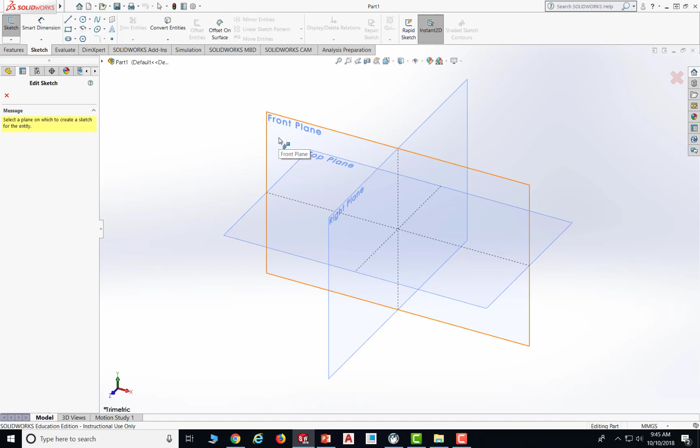And I go to Sketch. They actually already have one, so I go to Sketch. It will ask me for a plane, so I would create this part on the front plane, but it's up to you. I am putting it on the front plane.

Since I need to mirror and revolve in the future, I probably want to put the center lines first. So I'm going to go ahead and create the center lines. One center line is from here to the right, making sure it recognizes the origin, and the other one is vertical, a center line from top to bottom.

Then I am going to make the left part here. Once again, I just draw the approximate contour, then dimension that shortly. So I am going to make this part.

Go to a line here, I draw it straight down, and going up it has a little angle, as you can see. So I made it on the center line. Then I go up a little bit and make those two lines parallel, so I don't need to dimension later. And going up, I close the shape.

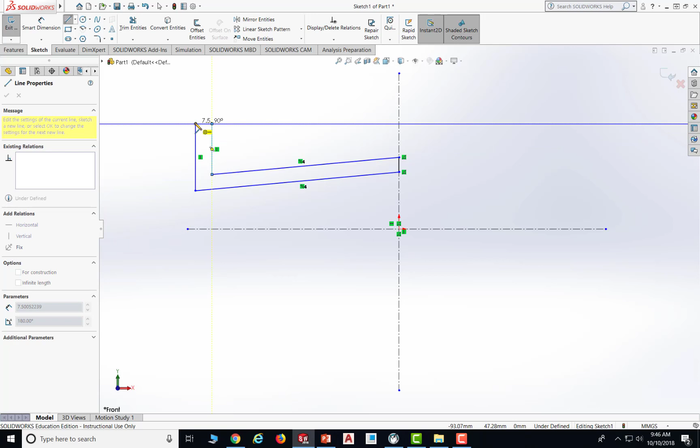From the drawing, as you can see, here are some fillets, and it says the fillet radius is all 5 millimeters unless specified. So we would recommend if you could put it on the sketch, make the fillets on the sketch, because when you get to the model, sometimes it's hard to create fillets. So put all the possible fillets on the sketch. I'm going to make the fillets with radius 5 millimeters.

So I see fillets there, and I say OK first. Then I am going to do fillets and select. So the radius is 5, and select those two lines. It's recognized there, but that's not right. So I'm going to delete that and select here, and this is the fillet I'm looking for, which is great.

So I say OK, then I do another one. I go to fillets again and select this tool, and the radius is 5. That's right, so I say OK.

Now I am going to give a dimension to those parts. So this is 22, this is 15, and the angle is 5, so I'm going to put them there. Actually, I should have put them first before making fillets, in case the fillets doesn't work, but in this case that's okay.

So I put the distance from here to there as 22, and the bottom one is 15, so from here to here it's 15, and also the length of that part. If we go back here, the length is 284, so I need half of that, so 284 divided by 2.

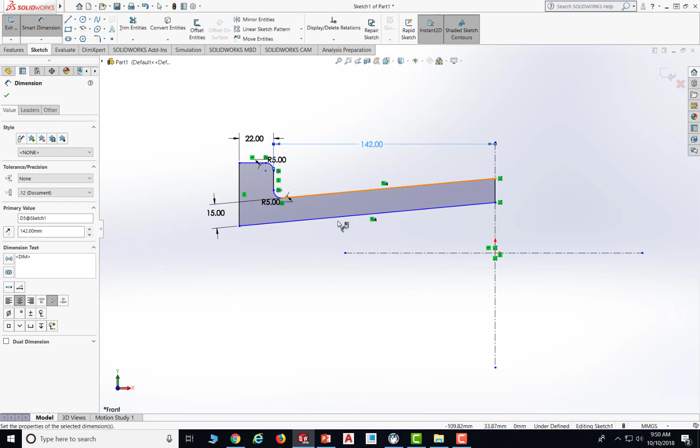So from here to the center is 284 divided by 2, all the way down there. Then I also need an angle one, so it says 5. So I put from here to the center line, the degree is 5, so I'm kind of close. And now I am going to extend the center lines a little bit.

And now you can see we have still some blues, so we need to figure out the height from here to the center line, and the height to the center line here as well. So we can go back to the sketch and look at the side view, the right side view. From here to the center is going to be the radius of this part, which is 100.

Also from here to the center it's going to be 75 divided by 2. So I'm going to go ahead and put those dimensions there. From the top, the smart dimension from top to the bottom is 100, and from there, this point, you probably select the point instead of the line because this is not a straight line.

So from the point to the bottom, the distance there is 75 divided by 2. With all these dimensions, the part is fully defined, and they're all black. So I'm in a good shape.

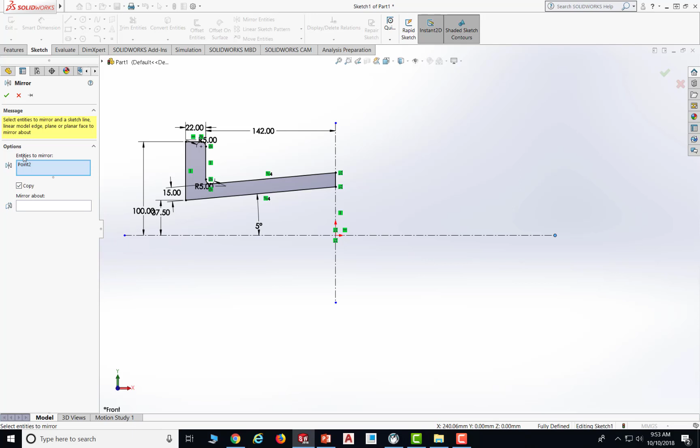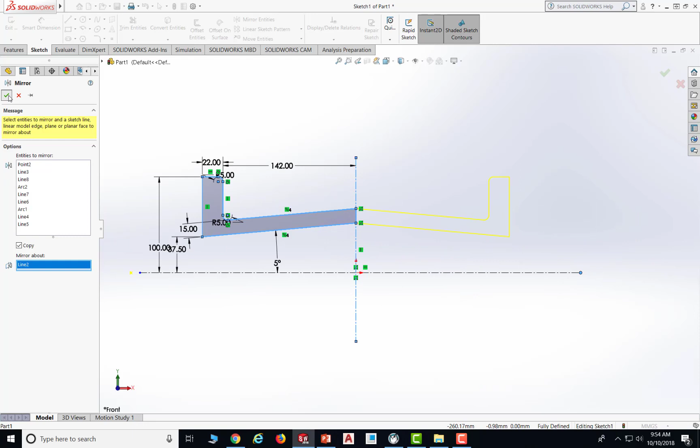So once again, make sure everything is fully defined until they're all black, then mirror, so you don't have to dimension them twice. So I mirror entity, and entities to mirror, I want to mirror all of them with the fillets. So I select all of them, and mirror about. This is going to be my symmetric line, and it looks right to me. Then I say OK, and then I save the work.

So save the work periodically in case you lose it. I will go to document... 128 and call it, okay, I'll just leave it as a part 1. Then I say OK.

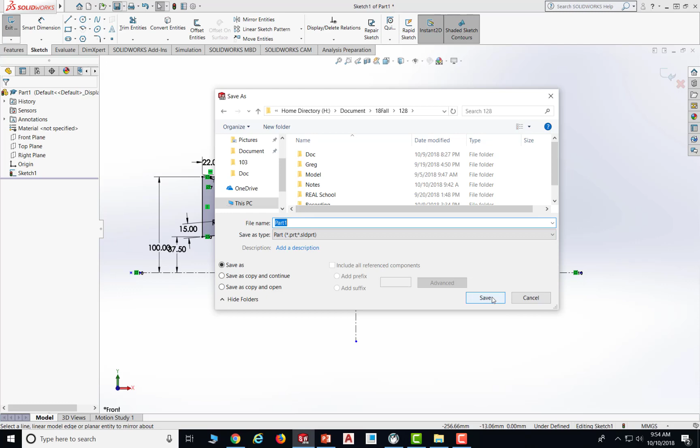Then after that, as you can see, this is dark, this is not dark. The reason of that is we have a center line there, so we could try to delete that. So when we revolve, we can revolve it at once. So let's go ahead and delete the line here. So delete that, so everything is dark, as you can see.

Now I am good. I am going to save the work again. Then I'm going to revolve it first.

Oh, it turns out to be underdefined. So let's take a look at that. Oh, actually I have an extra point here for some reason. See it? So I'm going to go ahead and delete that. It's fully defined again. So I am going to revolve this part.

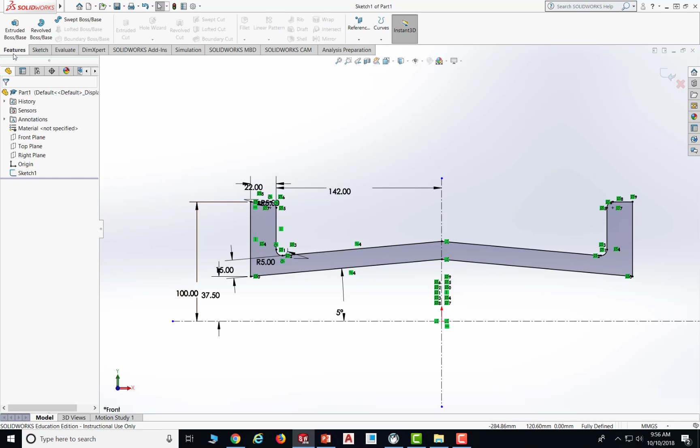So go here, revolve, and everything is selected. So it asks for the axis, so I selected this one, and it got revolved. Let's say OK. By doing that, I completed the main body part.

After that, I am going to create the top part. Now I am going to create a new surface, which is here. So if I look at the distance, it's going to be 110 on top of the top plane. So I'll double check. I think it's the top plane, and it's 110.

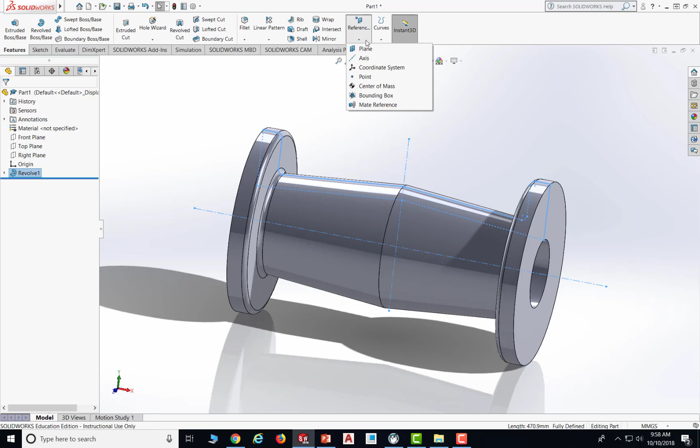So let's go back here. If I put my top plane here, yeah, it's exactly the top plane. So I am going to create a reference geometry, in particular a plane here, and it will ask me for the reference. So I want to select the top plane. I select the top plane and give a distance, says 110, and put the height there and say OK. And I got a new plane there.

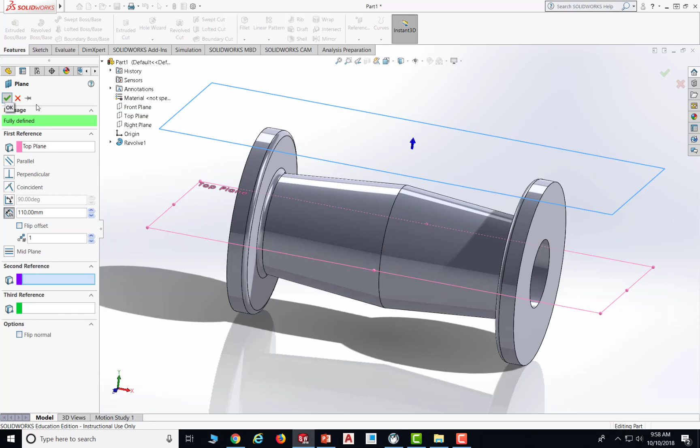And now I am going to draw the square piece there. So we can look at the dimension. The top part overall is 150 and has a hole there. It's 110. Right now we don't need to worry about the hole because we're going to use the hole wizard for that. So just put 150 there, and it's a square.

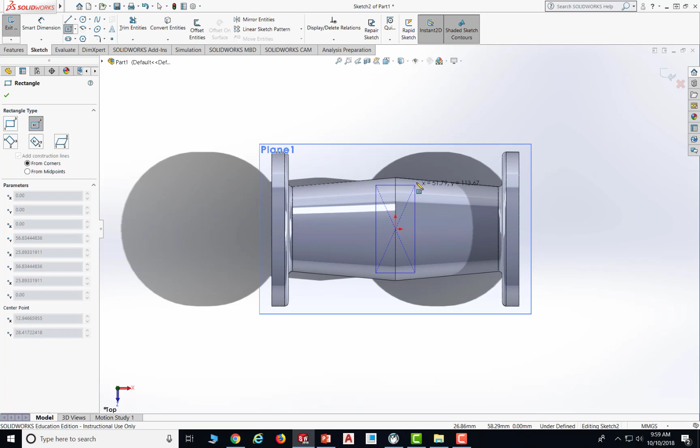So first of all, I want to change to a top view and put a square there. Go back to sketch and draw a rectangle, and I'll probably select this center rectangle, and this is the center. Do a rectangle here, and now I'm going to dimension that.

So it's 150 of each side. So 150 here, and also 150 here. And now they're all fully defined. They're all black. Now I am going to extrude this part.

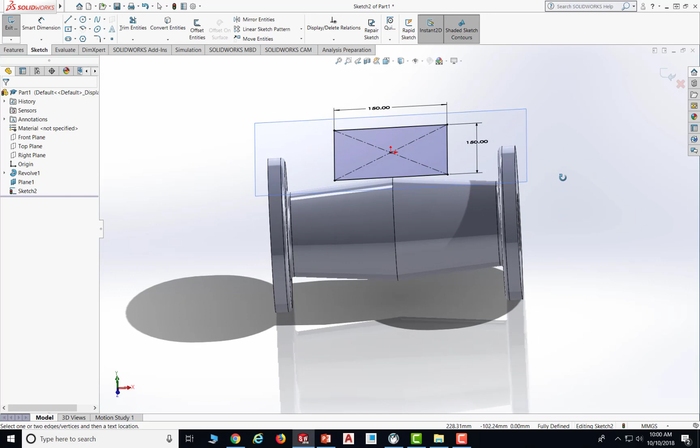Oh, before that, I have fillets. I have fillets there, and the dimension of the fillets is R20. Okay, R20. So I'm going to make the fillets. I go back to the top view and do a fillet. Select, so I put a 20 there.

Select the two edges, and also here, and also here and there. Select this and set it to 20, so they look good. I say OK, and it's still fully defined, and I save the work.

Then I am going to extrude. Right now it's 110, so I probably want to extrude up instead of down, because I made the reference surface here. So I'm going to extrude up at 22.

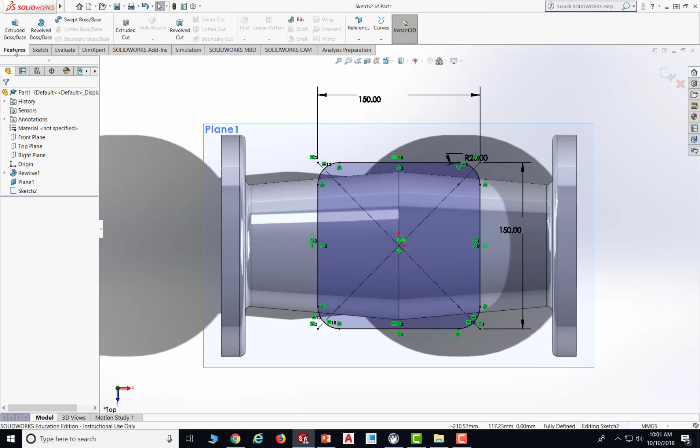I go back here, go to Features, Extrude, and recognize that. Right now the direction looks right to me, and the height is supposed to be 22. Change the height to 22, then overview looks right to me, and say OK.

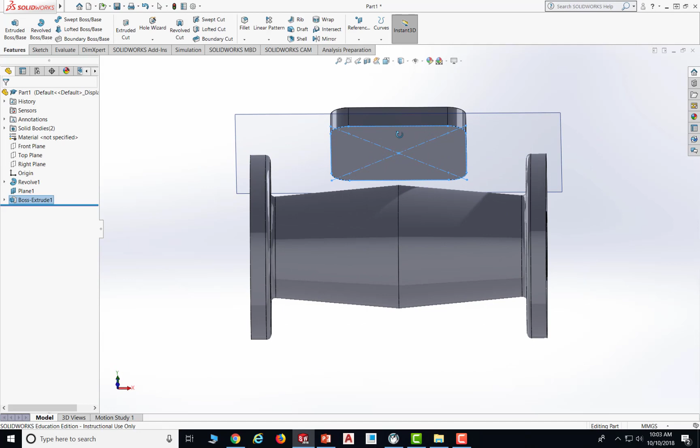Now I am going to make the circle here, which is this circle, from here to there, and extrude. The diameter is 80, so I'm going to make that circle. I flip it back here, and I still work on that sketch.

Go to sketch, and it will ask me a plane, so I say OK. Now I'm going to make this on the plane at the bottom instead of Plane 1. If you use Plane 1 it would probably work as well, but now I am going to select the bottom plane.

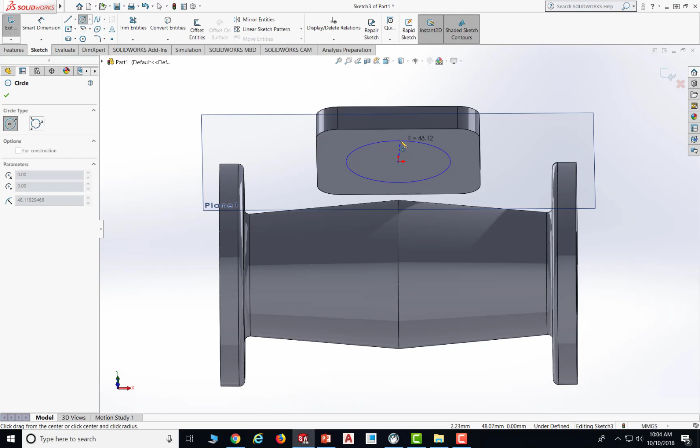And draw a circle there. From the center, draw a circle, and the diameter is supposed to be 80. So I dimension that with diameter 80, and say OK. Now it's all black, all fully defined, and I save the work often.

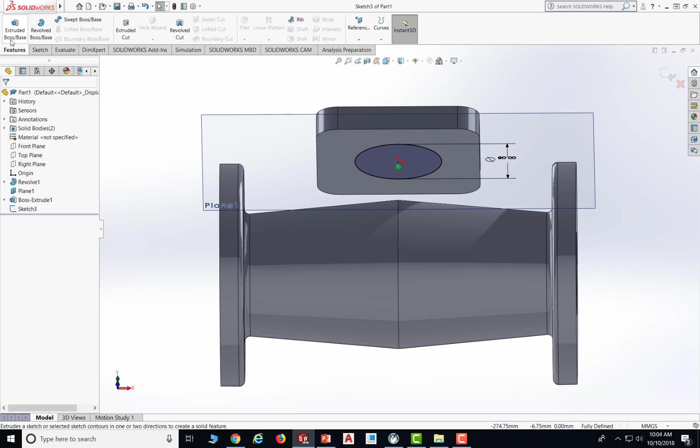Now I am going to extrude it down. I go to Features, Extruded Boss/Base, and go down. Right now I don't want it to be blind, but I want it to go until the surface. So, until the surface - I am going to select Up to Next. That looks right.

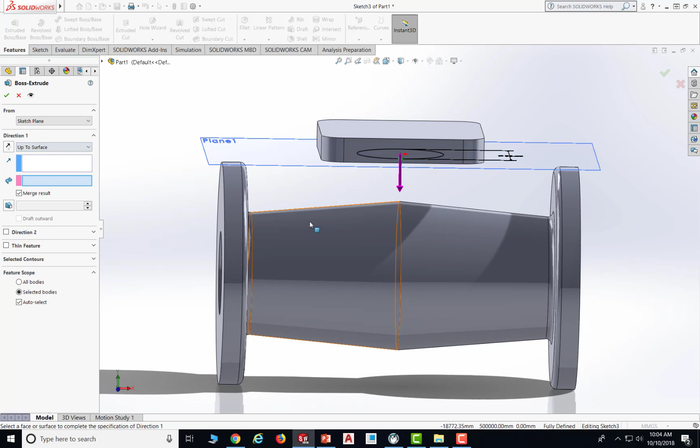Or you could select Up to Surface and select the surface. For this one you probably need to select both. So let's just do Up to Next - that's easier for us. Up to Next, and say OK.

And now I got this part. Now we are going to create this part, on the front plane.

So I'm going to draw the contour like this and do Revolve Cut. And when you do so, be cautious - there is a 1 degree taper. So when we draw this, we're going to include that.

We go back here. So the inner diameter is 48, and the radius is 3, so the outer diameter is 55. So we are going to make that part. First of all, we want to go to the front plane.

Go to front plane, then click Sketch and make a part on that. We probably want to go to a front view first and a front plane there. So if I don't want to see Plane 1 anymore - as you can see, there's a Plane 1.

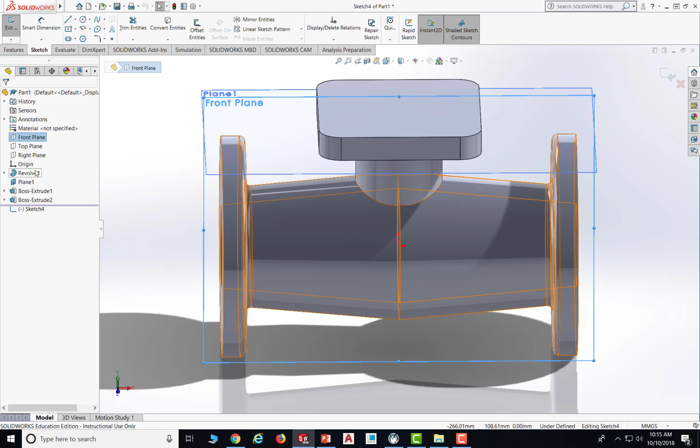So I left click that and hide it. I only want to see the front plane. I'll click the front plane, then go into the sketch here. So it's still on the front plane.

And I am going to draw that part. So it's from the top - draw the contour like that, and we're going to dimension that shortly. Seems like pretty little, so I draw it little as well. It's until there, so I just make it at the bottom, doesn't matter.

And I close the part. Now I'm going to give dimensions. So the top one, the dimension says it's 55 as the diameter. I go to Smart Dimension.

I do radius as 55 divided by 2, that's the diameter. And the inner one, the diameter should be 48 divided by 2. So I dimension that as 48 divided by 2. And the height there says 15, so I dimension the height here as 15.

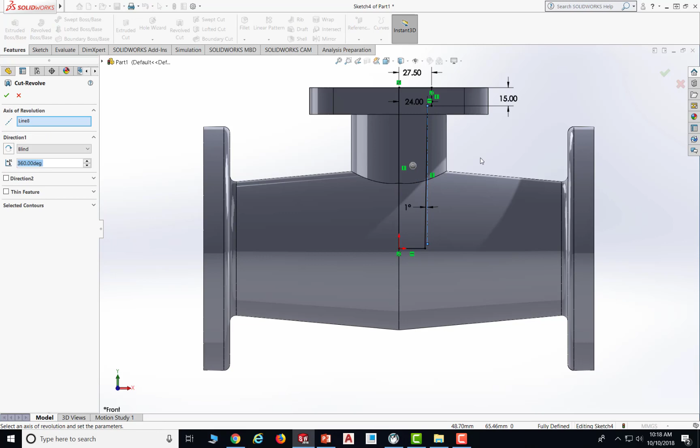Now I'm going to use the Revolve Cut. I go back to features and do Revolved Cut. This is a plane, that's right. I am going to select the axis here - this is apparently not the right axis, so I delete that, and I select the center line instead. And I say OK.

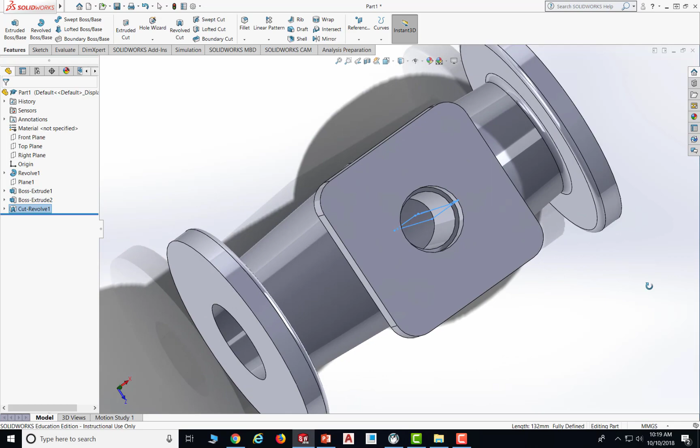So after that, I create a hole in the middle. I got a hole in the middle. And I save the work often.

Next, we're going to make all the holes. First, let's make the top hole. I switch to the top plane and make holes using the hole wizard. I select the third one, the simple hole, since we don't need the counterbore or countersink - just select the center, the simple hole.

For the diameter of the hole, let's take a look at the drawing - the diameter of the hole is 18. So I selected, we need not ANSI inch but metric, and the size is 18. We don't have 18 there unfortunately, so I go to show custom sizing, and I change the distance here to 18.

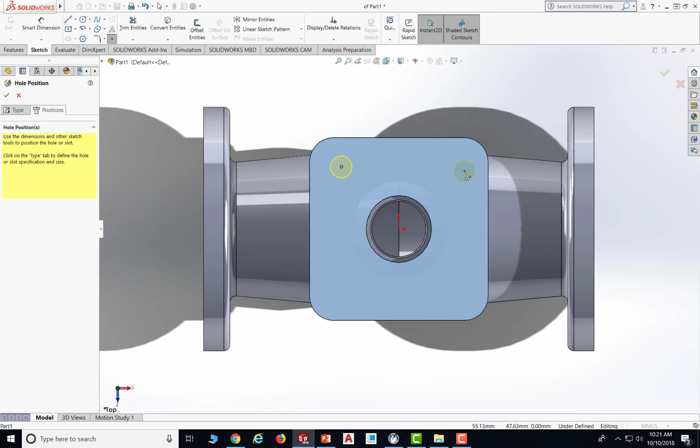Now for the position, I go to the positions tab. It asks me to select the surface where I want to place the hole. Let's put it here, here, here, and here. After that, they're all blue, so I need to dimension them. I go to smart dimensioning, and dimension here to here as 110, and same thing here, from here to here is 110 as well.

Now I need to give the side distance, so they're all 20s. If I go back, so they're all 20s - I'm going to give a 20 for them. From here to the edge it's 20, and from here to the edge it's 20 as well. You need to dimension all of them, so this is black, also from here.

Let's do it in another way instead of putting all the 20s. I'm going to make this vertical, or make this horizontal - instead of giving dimensions, I'll add relations. I select those two points and say they should be vertical, say OK, and that one is black. Now I'm going to make this two horizontal - add relation, those two are horizontal, and it's black. So I'm going to make this two a vertical relation as well, select this point and the other point, say they are vertical, and say OK.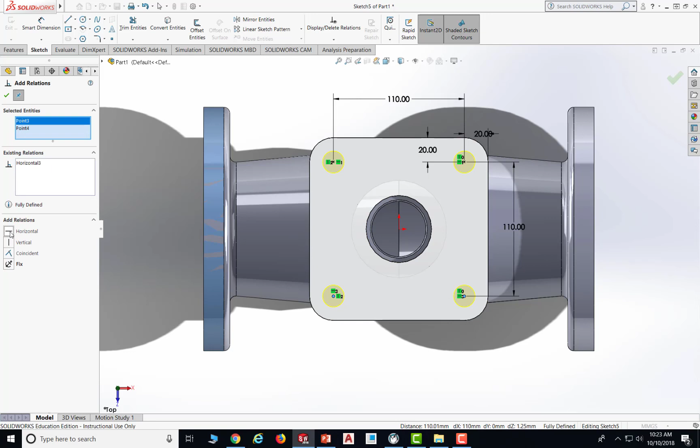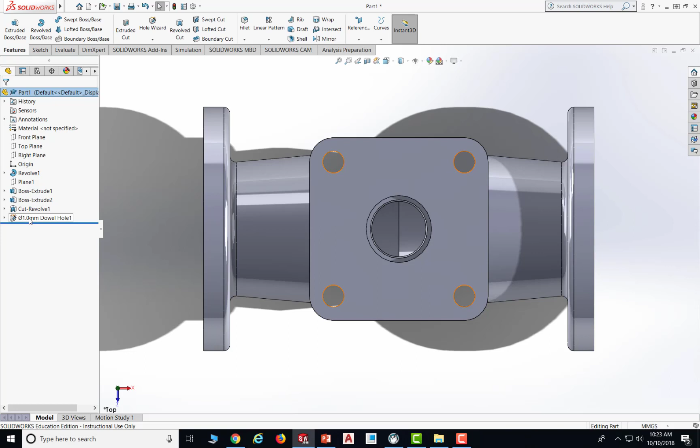I also needed to make this two horizontal, so I add the relation one more time, select here and there, and say they're horizontal, say OK. Now everything is black, so I say OK to the holes and double check, no minus sign there. I'm going to change the diameter from 1 to 16 to avoid confusion - I actually did change it to 16, but the name here says 1, so I'm going to go ahead and change it here.

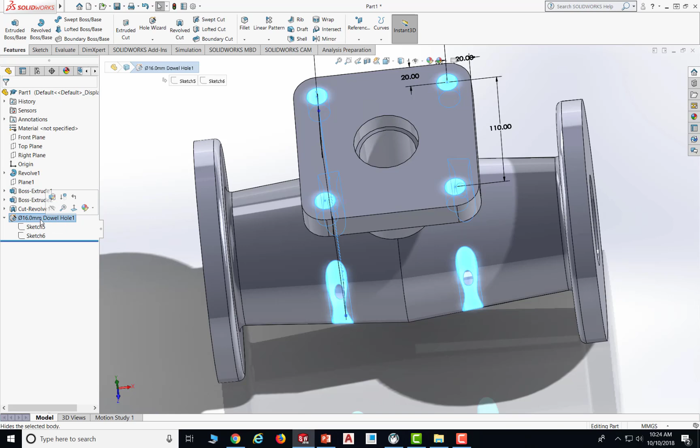Now all those holes, oh, it's actually got cut here, so we need to change it a little bit. Instead of through all, we need to go ahead and change here. So I left click or right click, doesn't matter, and go to edit features. In all holes, we don't want it through all, instead we want it up to the surface, or up to the next.

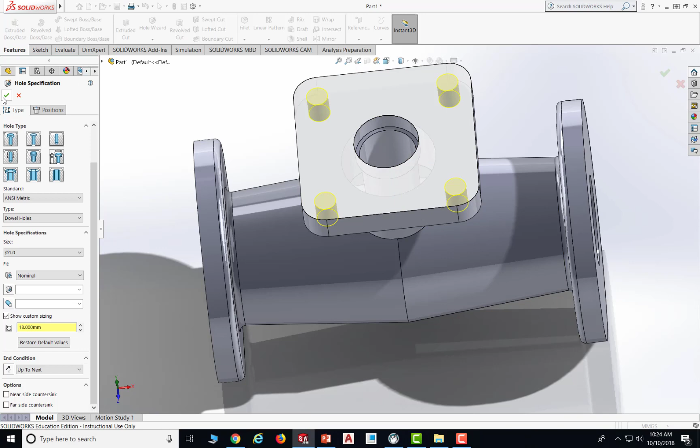Let's see what's going to happen if we do up to the next. Now it looks right to me, so just say OK. That's the hole we are looking for.

And now we are going to cut holes on this side. So I am going to switch it to the right plane. Go to the right plane here and make holes. So for the holes there, I have a 15 degree angle, the diameter is 18, and the centers are at 160. So I'm going to make those holes.

So I go back here, and first of all I need to create a center line. I go to sketch and click sketch, and it asks me for the surface. This is the surface I'm looking for, so I select the surface, and I am going to create a center line because I am going to dimension the 15 degree angle, if you remember that. So I put it here.

I am going to use hole wizard and go back to features. Okay, so it's not on because I need to go out of sketch first, and then go to features and go to hole wizard.

Go to hole wizard here and make a simple hole again, with diameter size 18. I take a look, it doesn't have 18 either, so I just change it to 18. So it's 18 here, and up to the next, looks right to me, and I go to position.

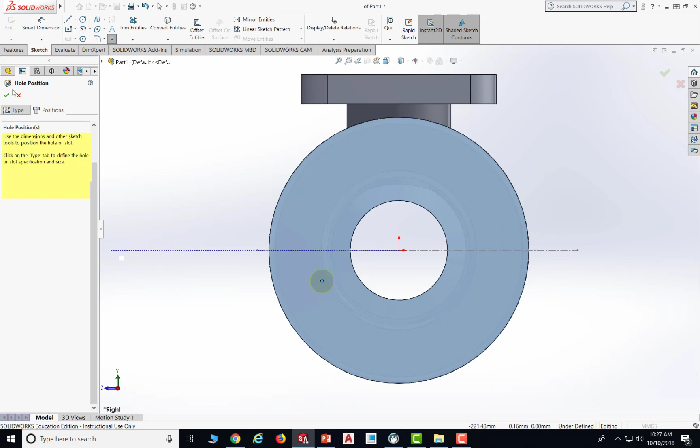Okay, we are going to dimension, so the dimension from here to the center, that is 160, and half of that is 80. So I put 80 here.

And also I need to give an angle, so I need to create a center line. Say OK, then give a center line there from here to there. Actually the center line there probably may not work because it's on the other sketch, so we do need to remake the center line there, and I'm going to go ahead and delete that center line because we don't need that. So from here to there, make a center line.

The center line has to be on the surface, otherwise when you dimension you may have trouble in the future. So select those two center lines and give an angle, say 15 degrees. Now as you can see, it's black, and now we are good for this hole.

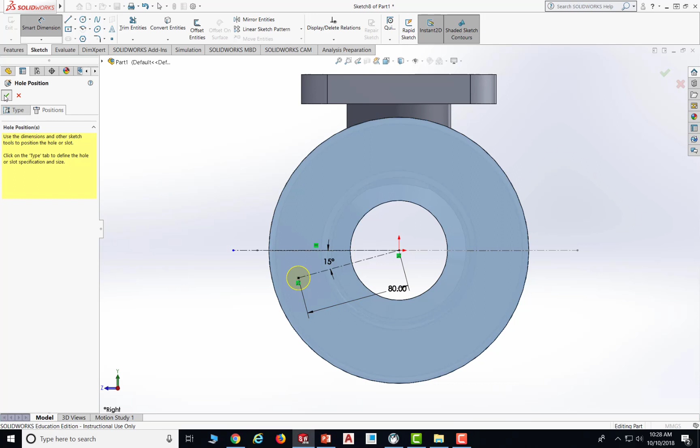First of all, I'm going to delete this sketch because we don't need that. So I right click and delete that and say yes. And I'm going to create a circular pattern to make more holes like that.

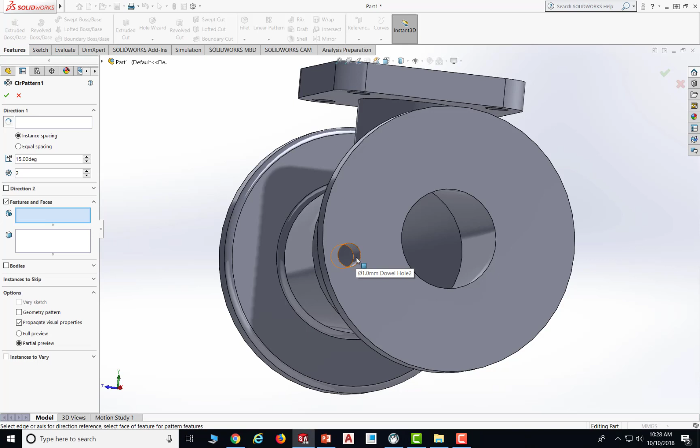So I go to linear pattern, circular pattern, and I want to make more of this hole, and I rotate. So for the direction, I select the entire part here, and it asks me how many do I want.

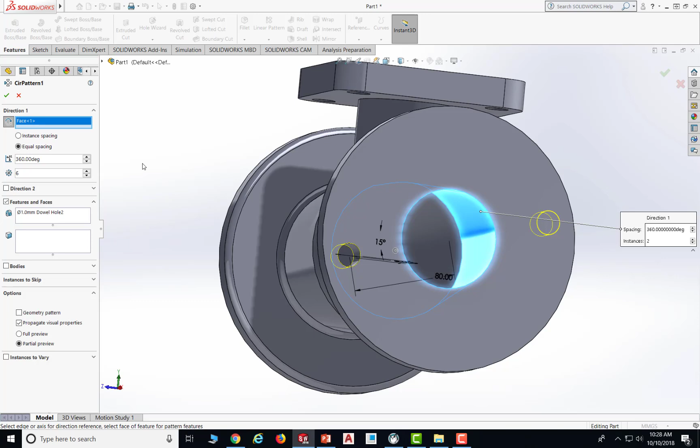First of all, I wanted to check the equal spacing option, and I need 6 of them. So I put 6 there, and the overview looks good. Let's say okay, and now that's the holes, and I do the same thing on the other side.

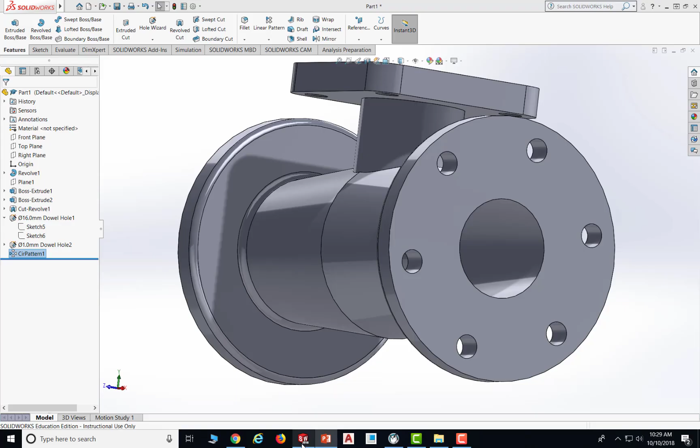So on the other side, I actually did a 15 degree angle on this side. If you look at the drawing, the side view, those 2 holes are in the same position. So 15 is there, so I go back to the part. I did 15 this way, so if I flipped it over, I would need to do 15 the other way instead. So I need to create the 15 degree in this direction.

So I am going to do hole wizard one more time and create holes. Before we do that, this is supposed to be 16, remember we changed that? So we changed it to 16. Now we go to hole wizard and get the hole here, it's the same size, looks right to me.

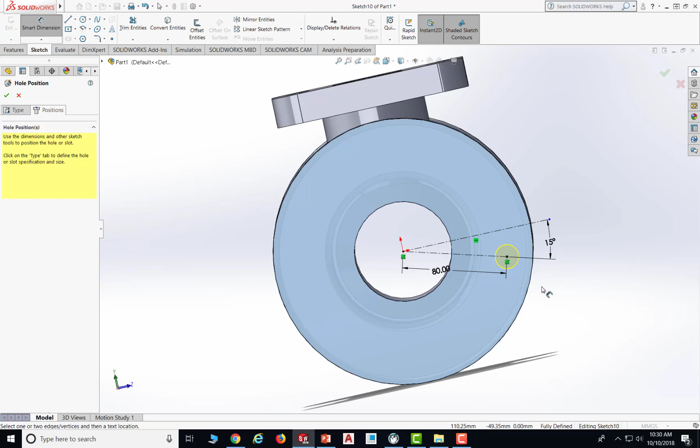I go to the positions tab, select the surface, and put the hole here, dimensioning it so they're the same dimension. It's 160 divided by 2, so 80 for the distance. I give it an angle, creating center lines from center to center and another from center to horizontal, making sure the horizontal relation shows up. I dimension the angle as 15 degrees, and change the diameter here to 16 instead of 1 to avoid confusion.

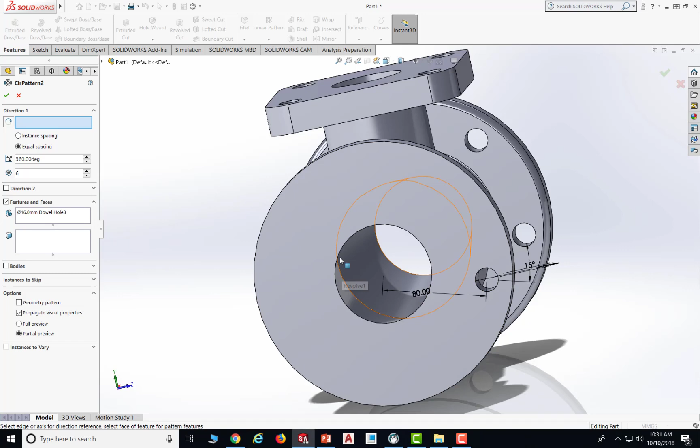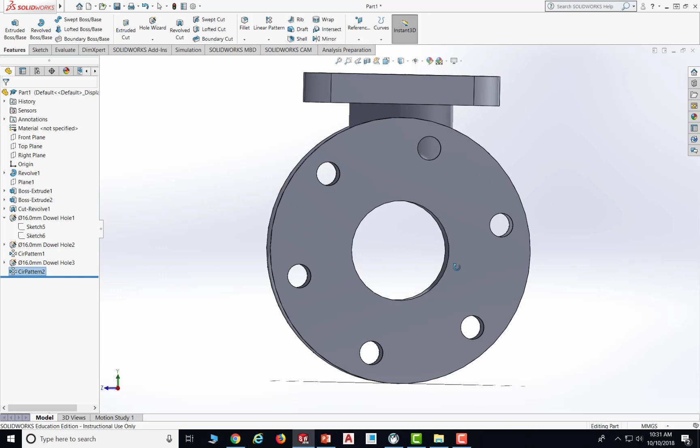Now I'm going to do the circular pattern one more time. I select the feature I want to create, which is the hole, but I select the entire body, not just the circular surface. For direction, I select the body instead of just the surface, because the surface or line sometimes doesn't work. I select all 6 and say OK. As you can see, all these holes line up in both directions, so I'm in good shape.

At the end, we need to add more fillets, here and here. This one we're supposed to add on the sketch, so I'll go ahead and fix this on the sketch. There are also fillets here, but those kinds of fillets we haven't learned so far — we'll worry about them in the future. So in this exercise, you don't need to worry about those fillets.

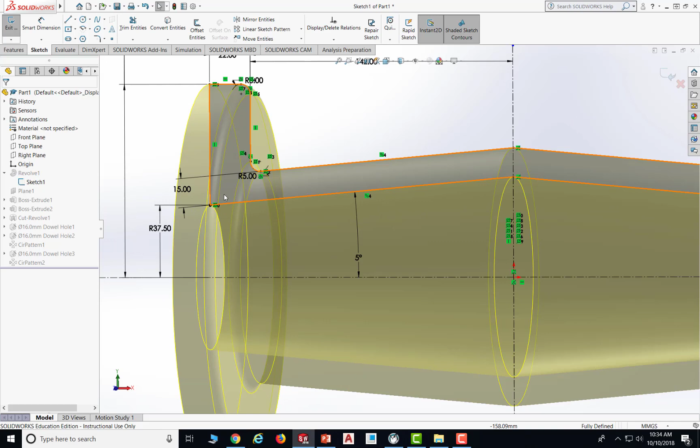Let's go ahead and change those two chamfers. This is 2 times 45, so for me that's a chamfer. I'll do that first. I go to the sketch, into this sketch, and I'm supposed to have a chamfer here. So I go ahead and do a chamfer.

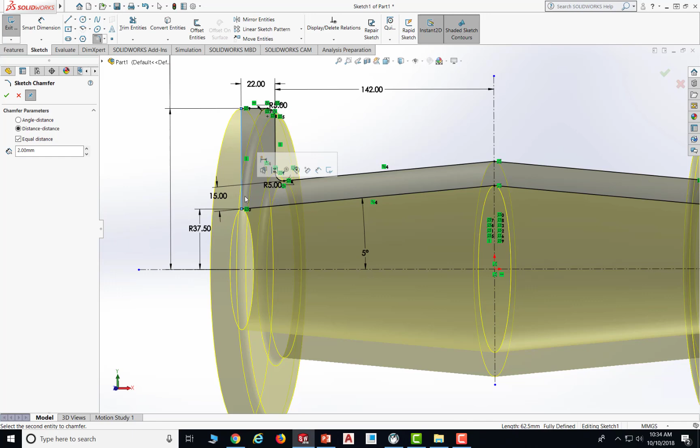I select this, and it says 2. I selected this, and the chamfer is here. That looks right to me, so I say OK. I also need the same thing on the other side, so I go to chamfer one more time, set it to 2, select this and that, and say OK. Now I'm going to save the work.

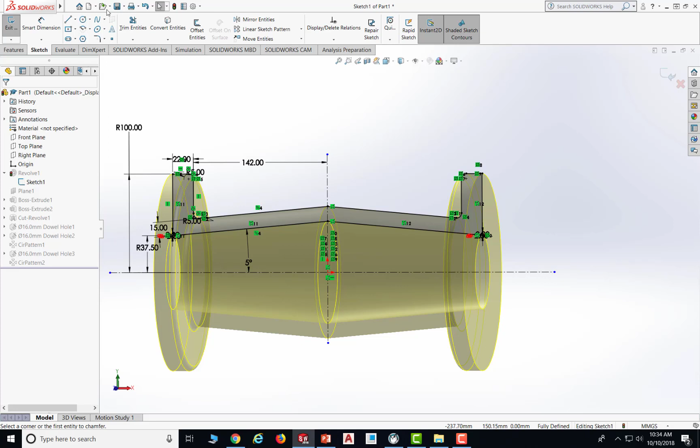When I save the work, it asks me to rebuild. I say yes, because I did a chamfer there, so the part needs to be rebuilt. That's why it's asking. So I just say rebuild and save the document. As you can see, I have a chamfer here.

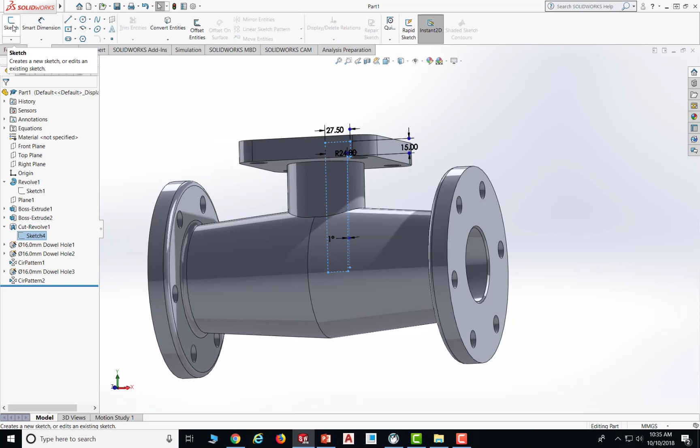The next thing I'm going to add is this fillet here — it's R3. Same thing, I need to go back to the sketch. This is the sketch, so I click that and click sketch, go into the sketch, and put a fillet from here to there.

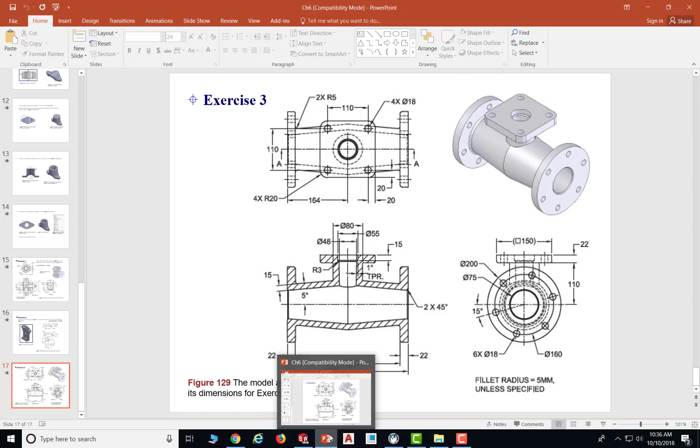Let's go back to the picture and take a look — it's here to there. So go back to SolidWorks, there's supposed to be a fillet there. I go to fillet and select, the radius is supposed to be 3. It's actually here, so I select this and that line, set the fillet to 3, and say OK.

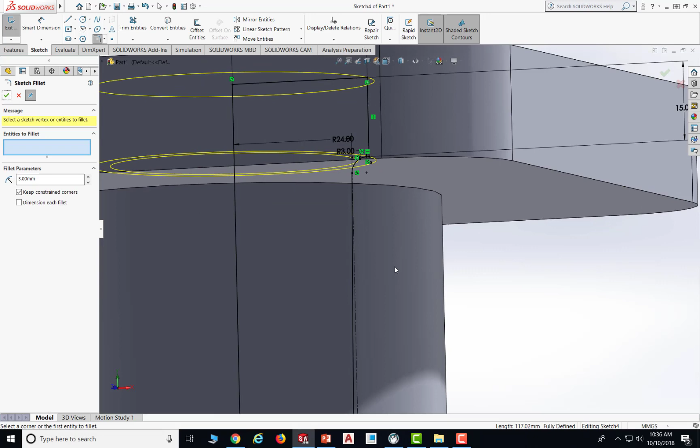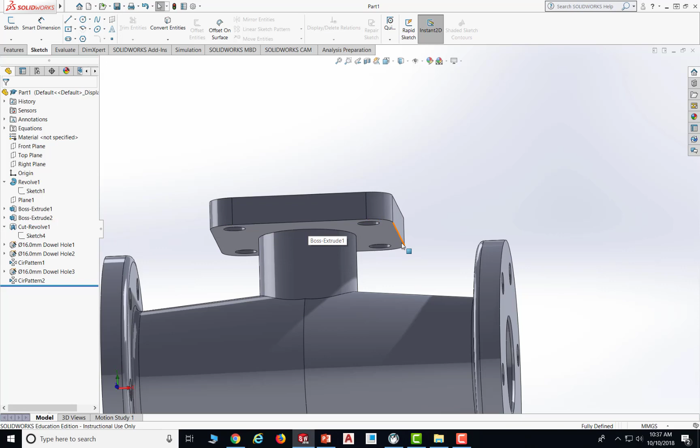It asks me to rebuild one more time because I changed the shape, so I say rebuild. Now the fillet is there, looks good to me. We also owe a fillet at the bottom if you look at the picture, but we'll worry about that in the future chapter since it's taught in chapter 7. So right now we don't need to worry about that. This is the part, that's all we need.

Now let's give a good view. I'll probably put it in an isometric view and zoom in, zoom to fit. Now you can turn it in if you have completed it.